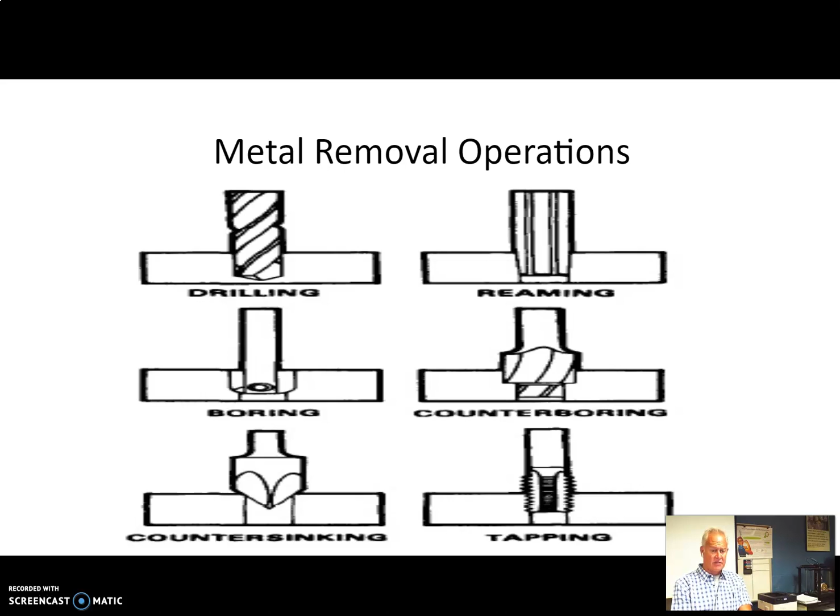If you look at it, this is bare bones. Some of you have had me before in drafting, where we actually got on the machine and introduced ourselves to a little bit of these processes, and some of you have had this experience in your own manufacturing environment at home. But these are the basics: drilling, boring, reaming, and the metal removal operations, as defined by the graphics you see here, with a bit of definition on what each is. You may not be getting into that level of detail when you define your processes, but this is a very important slideshow because it goes bare bones into the differences between these different metal removing operations.

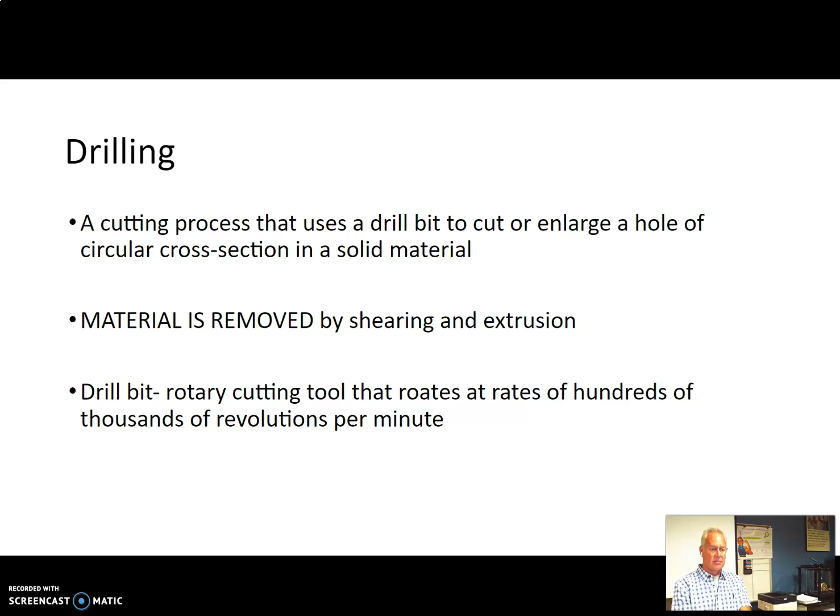Drilling is, more than anything else, a roughing out process that starts from scratch, placing a hole into some type of fabrication or metal raw material, or wood.

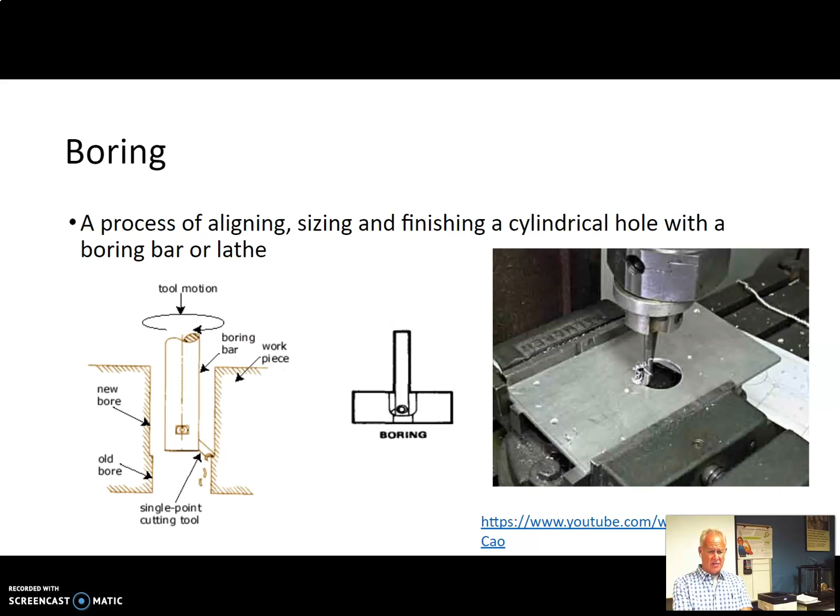It can be done by turning or by milling machines, and there are examples included here. Boring is basically taking a drilled hole and opening it up an additional amount to give an improved finish as well as a more accurate size. Reaming will accomplish the same thing with even less metal removal.

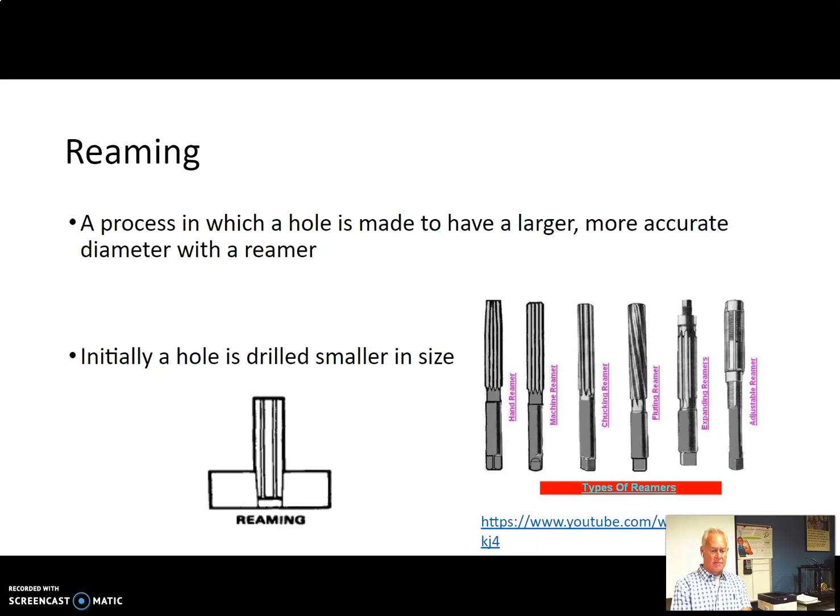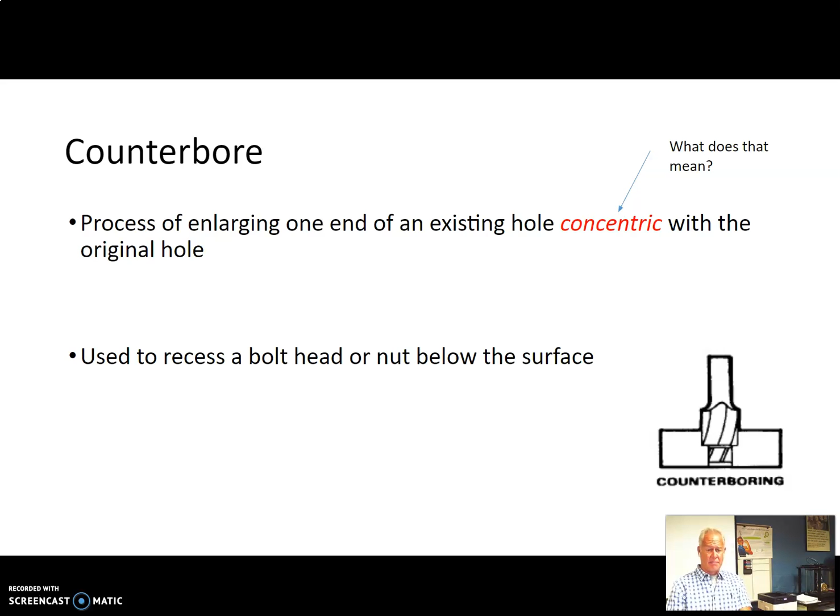Counterboring will basically place a concentric inline, larger diameter on top of a through diameter, more often than not, to bury a head bolt into the surface so the surface is clear. There's a couple of examples of each.

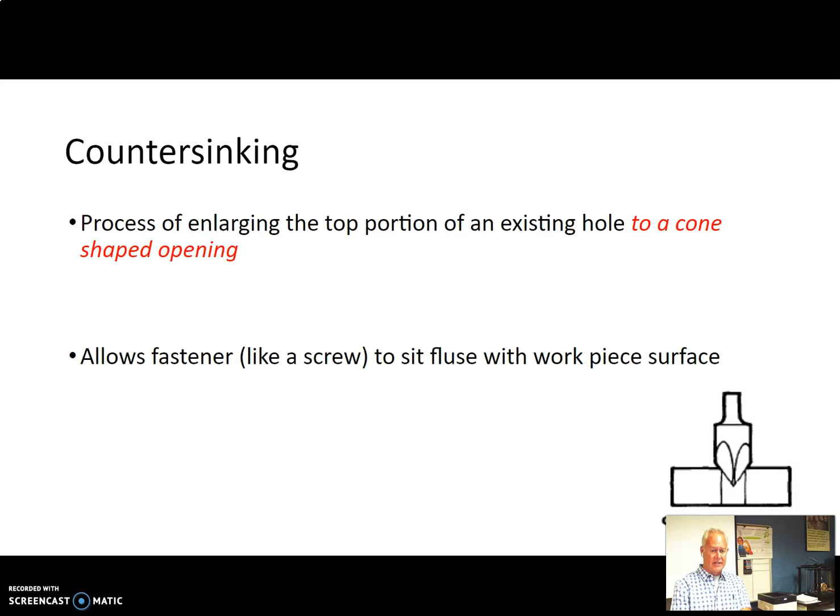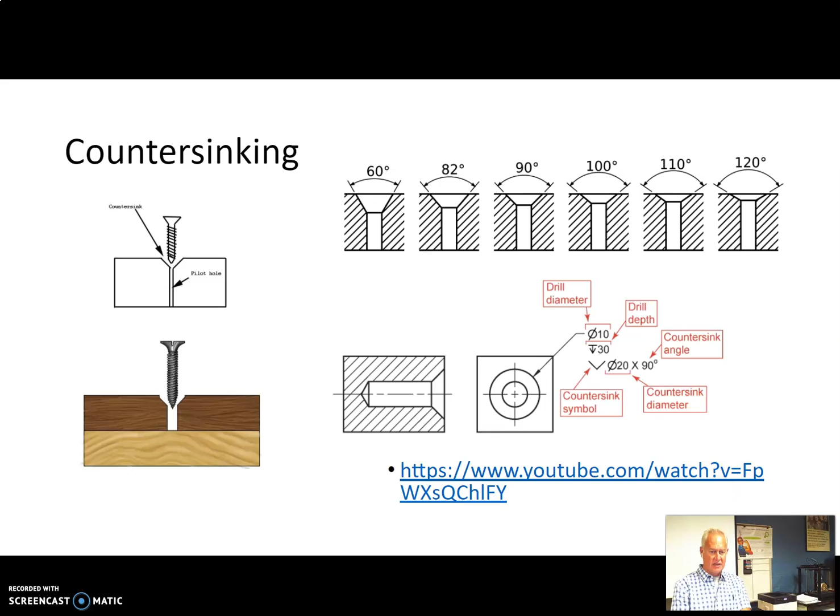Countersinking is similar, only now you're talking about a flathead screw as opposed to a cap head screw. There are examples of a wood operation and different angles of the countersunk head. Then finally, tapping, which allows you to place threads for a screw to actually thread into a plate, as opposed to being dropped in for clearance.

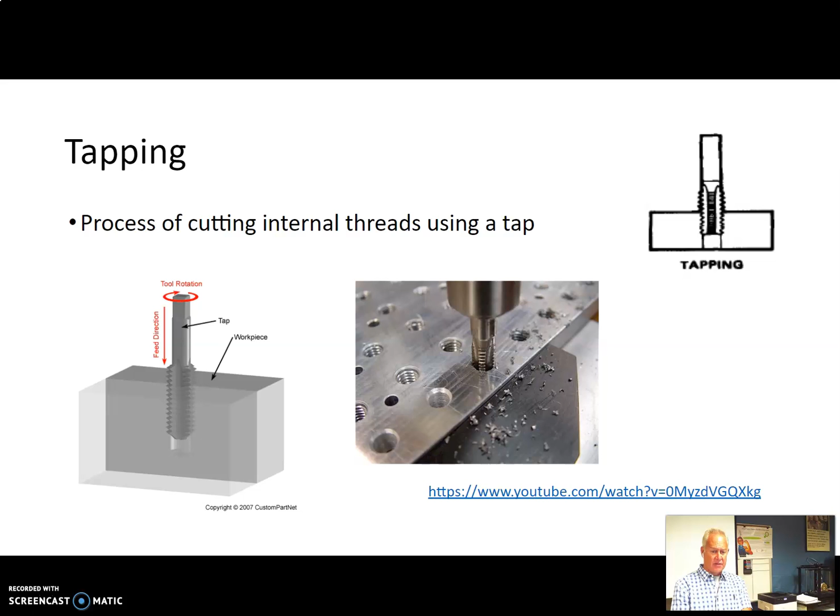Just wanted to show you that. This is the other attachment that illustrates the processes we're going to cover in a moment.

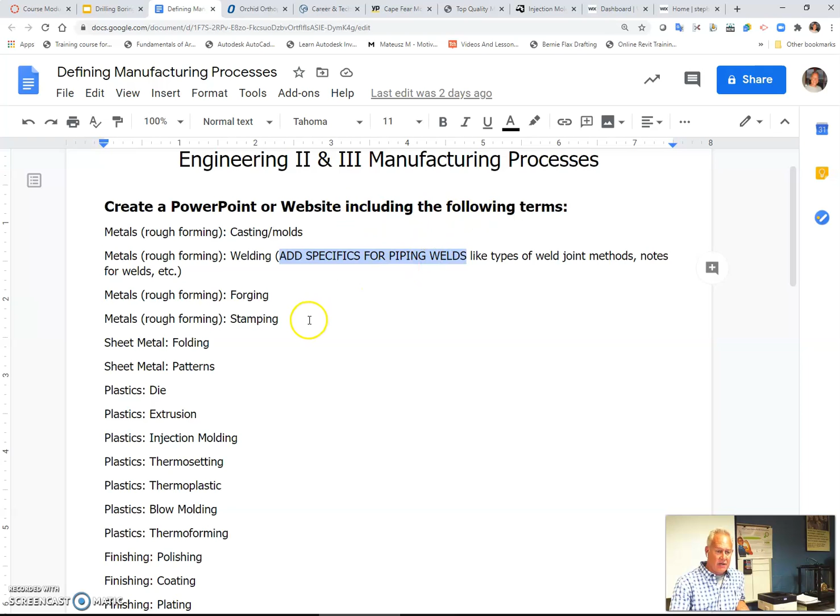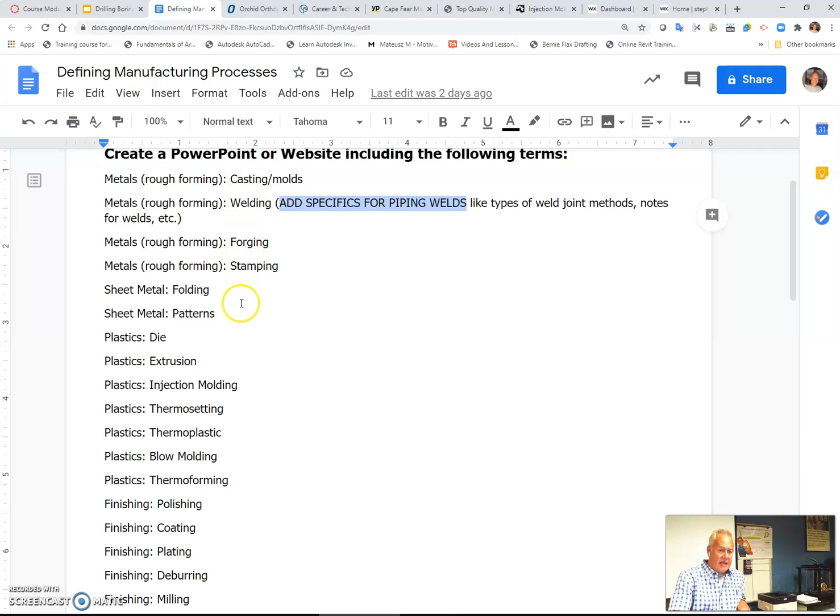When dealing with manufacturing processes, you categorize them by either metal removal, in the machining methods we just described, or other methods of forming or processing metal in a manufacturing facility, including castings, welding, forging, and stampings. There are many examples that apply in the automotive, medical, and other industries.

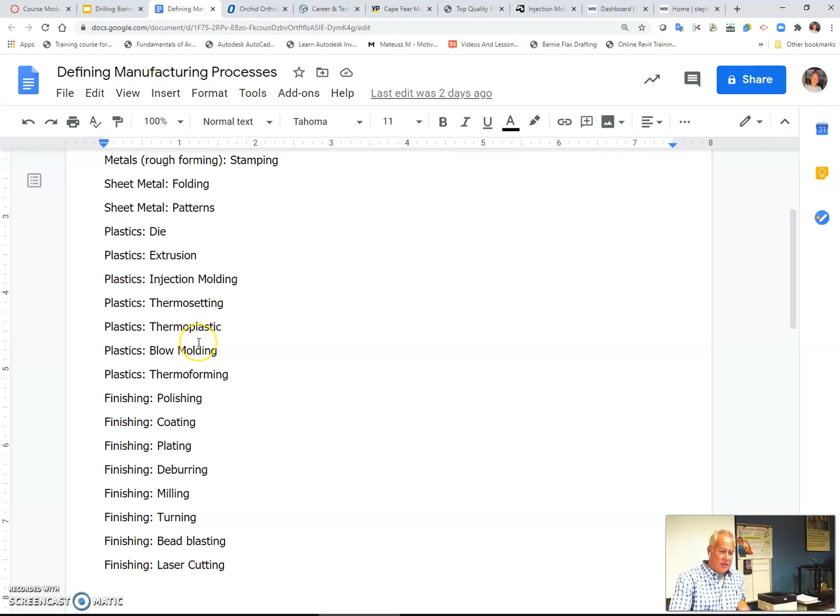When you're dealing with plastics, you're dealing with extrusions, blow molding, and so forth. Then finally, you've got finishing operations that cross over into both realms, but are primarily metal-based operations.

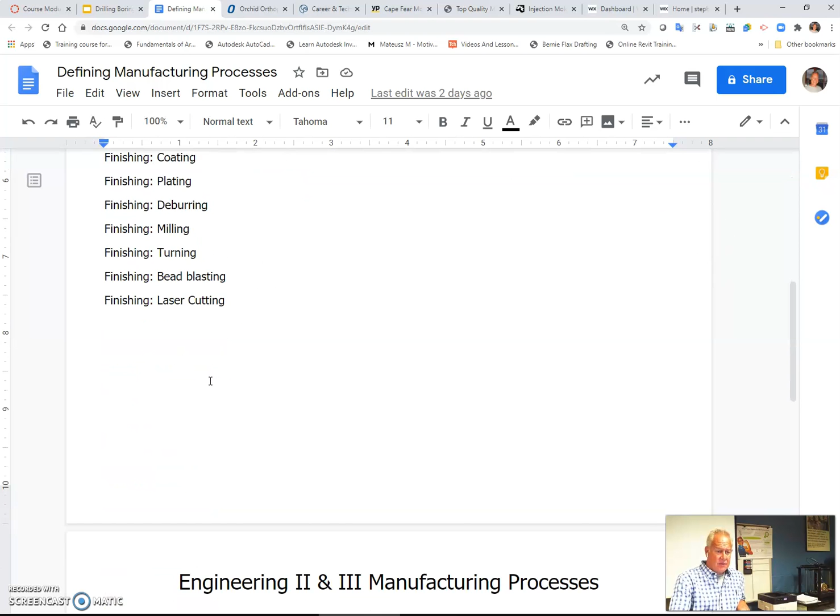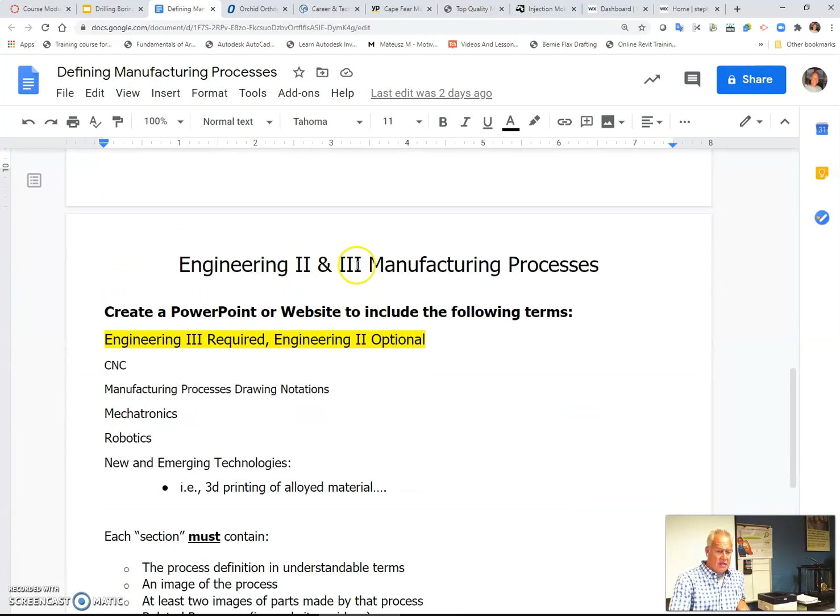I'm going to show you a couple of websites where you can access all this information with some comfort without having to mine the whole internet. This first page is all Engineering 2. Engineering 3 cuts to the chase, and they have to—Engineering 2 is optional—go into a bit more advanced research.

I'd like you to capture automation in the way of robotic and CNC manufacturing methods, but also—and this isn't even current by today's standard—3D printing of alloyed materials, which has been going on for a while. Also new and emerging technologies that may feature artificial intelligence in the manufacturing realm. This is cutting edge, and it's evolving each and every month that passes by.

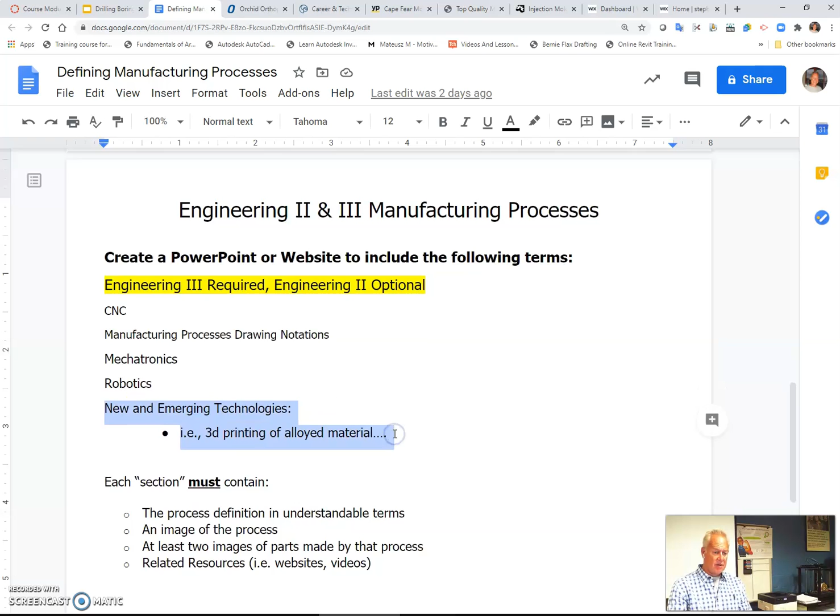This section basically includes the criteria from which you're going to put together your PowerPoint. Again, very similar to last week.

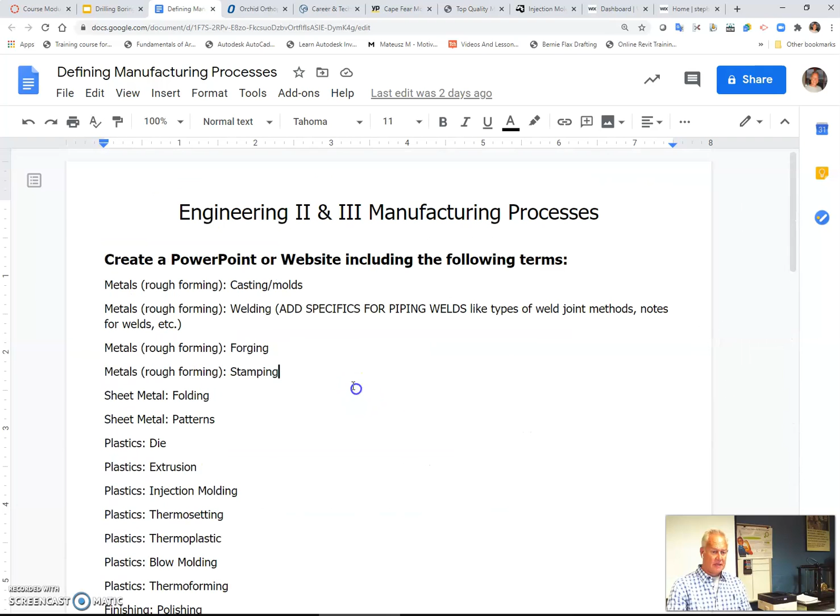Now, a couple of websites I wanted to turn you on to. One, Orchid Orthopedic Solutions—this is a company, a flagship, that I used to work for once upon a time. Orchid Orthopedics is basically one-stop shopping, a supply chain to the medical device community. It's a company I worked for a number of years out of the forging facility in Holt, Michigan.

If you click on the relevant facilities, or if you click on the process, which under manufacturing is where we are, you can peruse this website to your heart's content, but we're primarily looking at manufacturing operations. As you can see, they coat, they forge, they cast, they assemble, and they machine. If you click on any of these links, you'll find relevant information and pictures related to what you're looking to accomplish with your slideshow.

These are all items that you might have even seen in the classroom here. This is the facility where I spent the majority of my time with while at Orchid. But I've also worked with other companies in Arcadia, California, as well as the Orchid Detroit facility, which isn't listed here but is listed under machining, I believe.

Peruse this and give me your impressions. This is a company that's near and dear to my heart—I'd still be working for them if I didn't get the itch to move into the OEM realm. They're quite impressive, growing over the years, and they're an overall umbrella of institutions that can address instrumentation and implants from a variety of manufacturing methods.

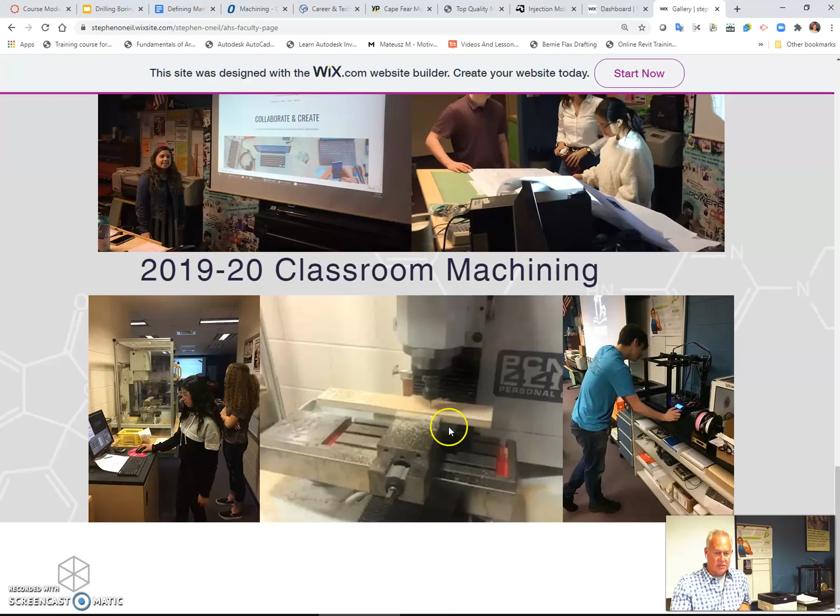Lastly, these are all keyword searches—I'm not going to get into the weeds of giving you URLs—but lastly, our own site, my site, which is the home site on the faculty page. Under the gallery link, you'll see images from our Toys for Tots efforts, Chick-fil-A Club, and our showcases, as well as your own images from past accomplishments, but you'll also see some machining illustrated in here too.

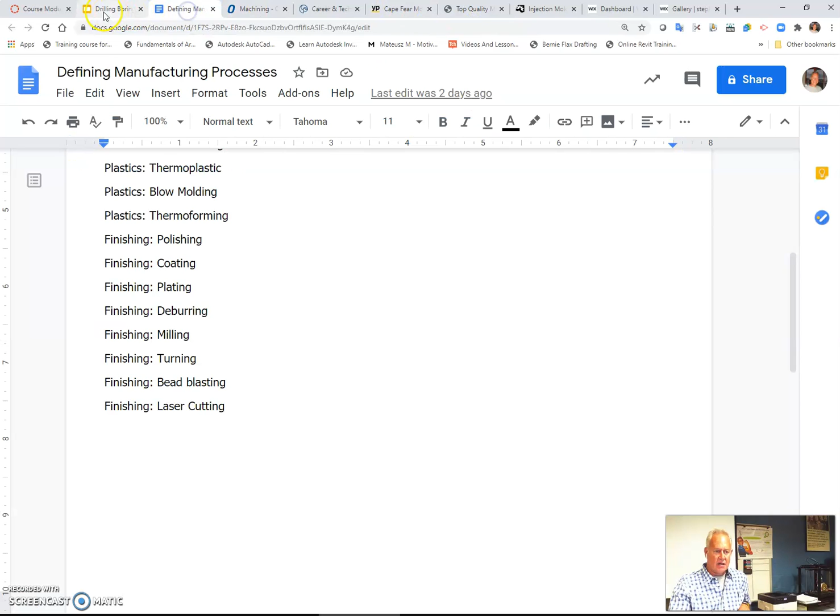So these are sources that will help you out. Again, Orchid Orthopedic is probably your most far-reaching website of interest insofar as gaining familiarity in the casting, forging, and machining operations available in our industry. I just want you to have some fun with this.

This is something that I think is basically an extension of all things design, so it makes no difference whether you're in the mechanical class like you are now with Engineering 2-3, or even the Revit class with Architecture 2-3. You have to look at the next step insofar as how this leads to a career, and I can assure you that all things design lead to some form of fabrication, whether you're building homes, structures, commercial, residential, or in this case, fabricating products for the medical, automotive, or other far-reaching industries across the world. There's a lot of opportunity here to not only accomplish our goals of defining these processes, but also for your own sake, maybe starting to further define what interests you stemming from our work last week.